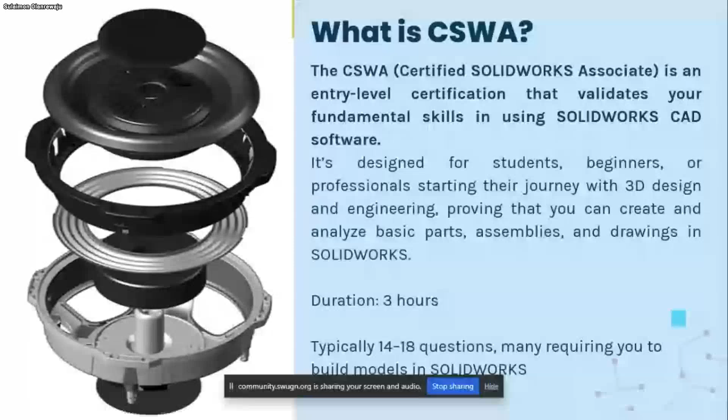So what do you need to pass, what are the requirements? This is one of the simplest, as I've said earlier. But your main focus should be: what is actually the question?

It's always very, very key to understand the question. Same thing goes - I know most of us here are students - it goes with your real life exams.

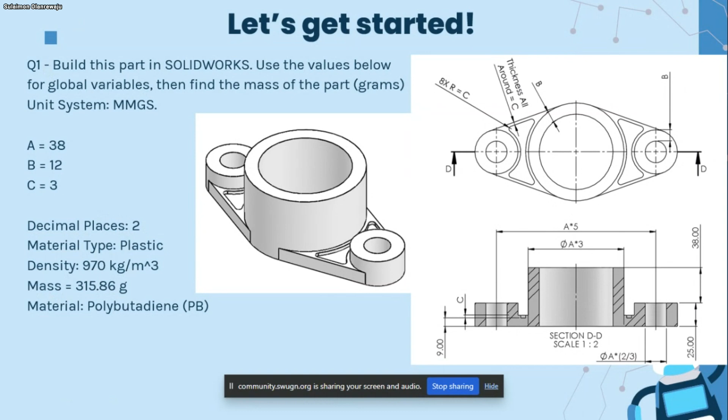The material here is Polybutadiene, that is PB. So once you want to change the material, you just type this in the material field. Notice I'm not supposed to show the value of the mass here, but this mass is wrong, let me just change that.

So as I was saying, let's go ahead and start. Make sure before you start your exam that your SolidWorks is already running. If possible, you should have already started the new part. So Control N for a new part, select it, and let's start.

So as I said, the first thing is: come to the bottom right corner of your PC and change it to MMGS. As you can see, there are several options here, they always give you IPS or MMGS, so select MMGS.

Material: change your material, select your material, just type in the material here - polybutadiene, as given. Then click Apply and Close. Make sure the density matches the one given in the question, that is 970. Then close. So we've done 2 out of the 3 main things needed.

Let's go back to the third one: what units, what is the actual question. So we've digested the question, changed the unit, and applied the material. Then save your work - you can save immediately, even without sketching anything. So let's save our work as Q1.

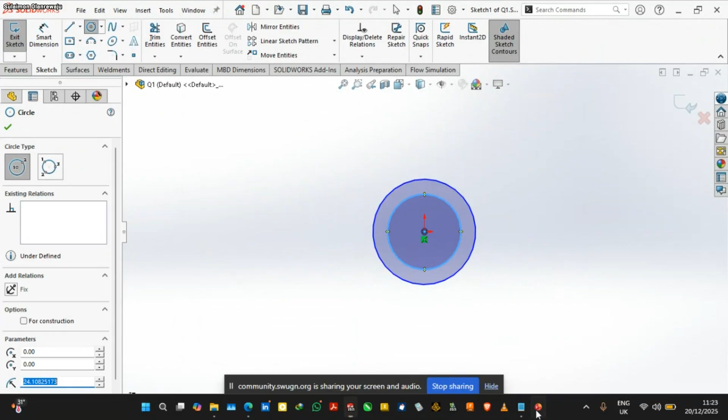Another thing is, if you see a question like this, most questions or some models are actually symmetrical in nature. What do I mean by symmetrical? If you look at the question again, you notice that this model given here is something you can actually design half of, and just after you're done extruding and applying all the necessary features, you can just mirror it and get your answer. That saves you time doing stuff like this.

I'm not going to do that one first because it might sound complicated. So I'm just going to do the basic: draw this circle, offset inside, draw this circle, offset inside, then draw this circle, offset inside. If you can do that, then you've already gotten the basic stuff of what you need.

So let's start that. The next thing is to draw these lines and make sure they are tangential to this circle, the outer lines. Let's just quickly do that, it shouldn't take time.

Circles, let's just do this. So one can just start drawing roughly and use your constraints to modify everything later on, like the way I normally made this circle. Let's start with just getting what we need.

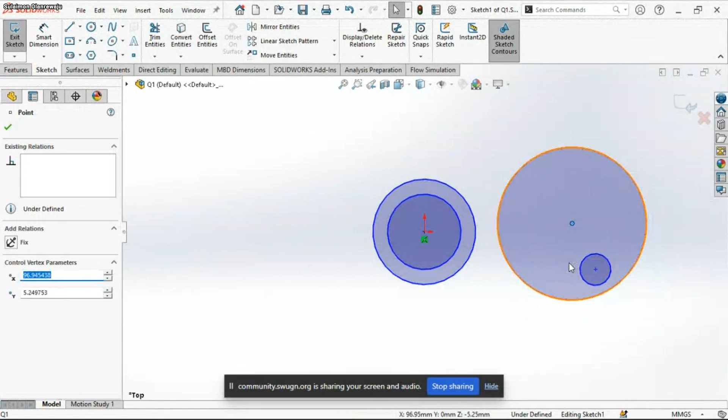Now I want to make this circle and this circle concentric. Oh first, if you notice, this circle now you can move it any way you like. Why? Because it's not constrained to location. So let's just try to make it horizontal with the origin.

So what did I do now? I clicked the center of the circle and the center of the origin, and it brought out disappearing balloon options that you can select out of. So make horizontal is what I chose now. If you can't do that, you can come to your left hand side and just add the relation needed, which is horizontal.

So the next thing is to make this circle and this circle concentric. Remember, you could also offset it, but it depends on you, anyone that makes it easier for you.

So I'm selecting this circle, and while holding control, make sure if you're selecting things you're holding your control or shift key. So I've held my control while selecting this tool. It got options: is it co-radial? We don't need co-radial. Is it tangential? No, but it's concentric we want, that's why I've selected concentric. I'll also come here and choose it.

Each existing relation will always show you once you select a particular object. Like now, if you select this circle, you see the existing relation under it. You see that it's nothing, no circle. But if you select...

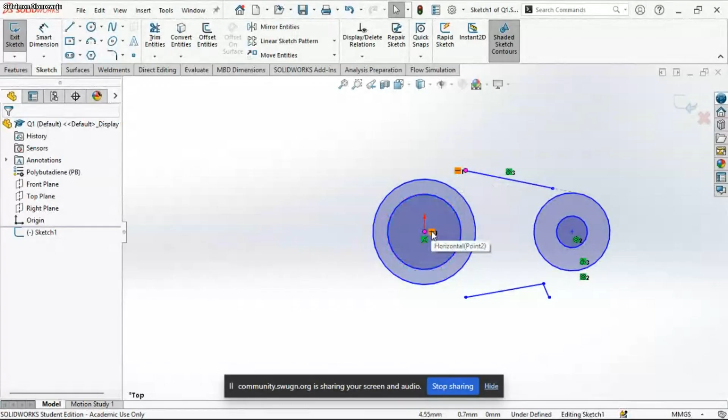So any constraint that you feel is obstructing you, you can just come here and delete it. We are still going to need them though, I don't need any line, any constraint, any relation yet.

So this line, we want to make it tangential and coincident with this circle, same as this line too. We want to make it tangential to this line and coincident to it. So let's just do that now.

Line, let's make it coincident first. This and this, you select them, then you come here and make it coincident first.

This point, this vertex of that line, and this—I want to make it coincident also. So the next thing is to make them tangential. How do you make it tangential? You cannot make a vertex tangential to a curve.

You can always make a line, a straight line, tangential to a curve. So while holding your control key, select the two of them and click tangent. Same thing is done for this one too. Make sure you click out after you've held control to select two entities, because now we are selecting a brand new entity.

So we do that to make it tangential, and we are up and around it. The same thing is done for these two too. Sorry, I was not meant to delete that previous horizontal constraint, so I can just add it back. As you can see, this thing is moving—our circle is moving. So you select both and make them horizontal back.

It always helps to add symmetry lines. If you go back to our plan now, look at our mid line, our center line. It's always good to add them when you are modeling or sketching, because it helps in the long run. Like now, maybe when you are done with this part, I want to mirror it to the other side. Do you understand?

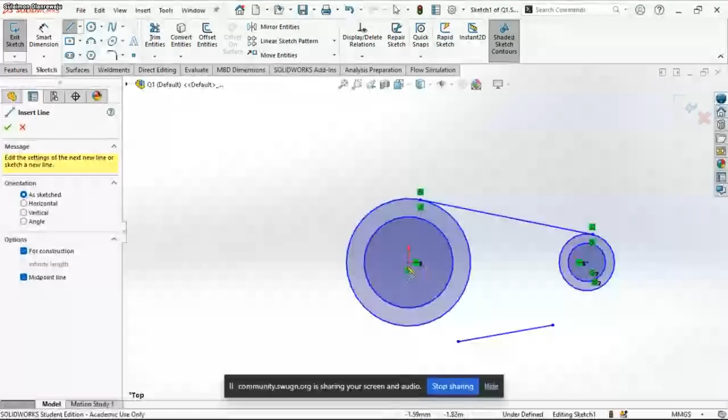So as I said, let's just click on line first, select construction in the options pane, and click midpoint line. So starting from this midpoint, you just need to let it go to any even level.

Doesn't matter. You can do the same thing to the vertical part, and you can do the same thing for the horizontal part too. So make sure it's straight, and notice that if you are drawing this, there is actually—how will I put it—a

increasing value, change of value as you are moving. That is to tell you the distance you've traveled, the angle. Like now it's showing that I'm traveling 124.55 mm at 180 degrees. That is in a straight line. So make sure you notice that while you are modeling.

And the constraint is showing coincident and horizontal. So let's just make it that and stop. Notice that these two construction lines are not used as a measure of knowing if your sketch is fully defined. So let's just keep going because of time, because we have to be conscious of that.

Since we've already done this, you can just mirror it. You get, but we have to make sure that all dimensions—aha, I knew I was going to make this.

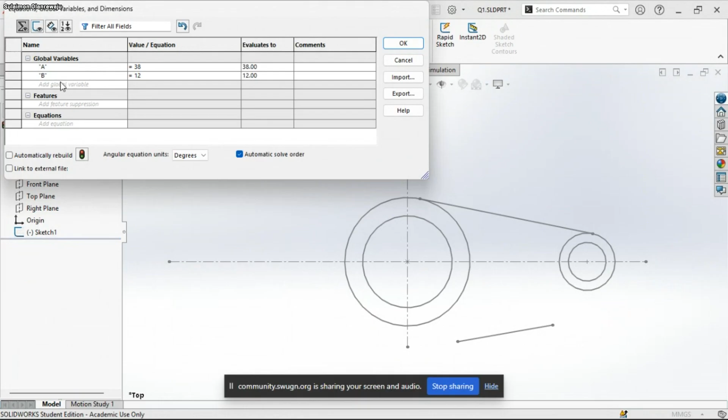Our B, make sure they're in capital letters please. B is 12—make sure you are very sure. And our C, after I can see, is 3 mm. Once you are done with that, confirm, always check your equations very well. Let's see, 12, very good. So do that.

Then we'll go back to our sketch. If you want to go back to your sketch, instead of coming here every time and clicking edit sketch, you can just click on the sketch and it will give you balloon options, and you come to edit sketch.

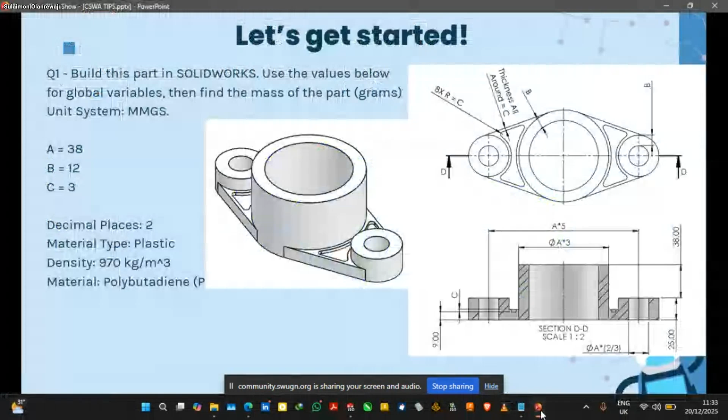So now let's start with our dimension, the basic dimension. Now set B is the obvious one here. So once you're dimensioning, you have to be very careful. The distance between this circle and circle is what? So it's showing 9.6 now, but we don't need 9.6. No, we want to enter an equation, a global variable.

So you always start with an equal to sign—make sure you always start with an equal to sign. So you can now come down here, then it will give you the options of your global variable that you saved with, and you select the right one. That is B. Then you click select.

So there's a difference between—now for example, let me just say I want to do the same thing for this.

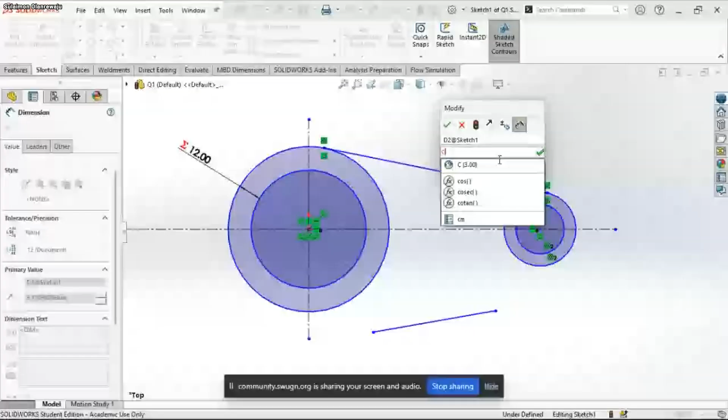Maybe the dimension for this is, if I just go ahead and type C and click this and say yes, it will just give me the actual dimension. It will not give me an equation format like you're seeing here. Be careful about that, we have to be very careful about that. This equation sign, this summation sign, shows that what you entered, your global variable, is what is being implemented in this dimension.

Another thing to do is go back to the question and look for the nearest easy dimension. So, the dimension of that one too is B. So it's either you come here and put your equal sign, global variable, and select B. Be careful when doing this.

The dimension for this is not showing in the plan view, but if you check the section view here, you notice that the dimension is given as diameter A multiplied by 2/3. So that's one thing about SOLIDWORKS.

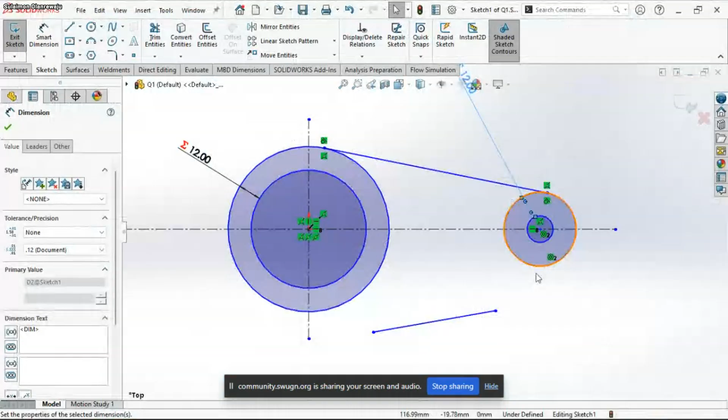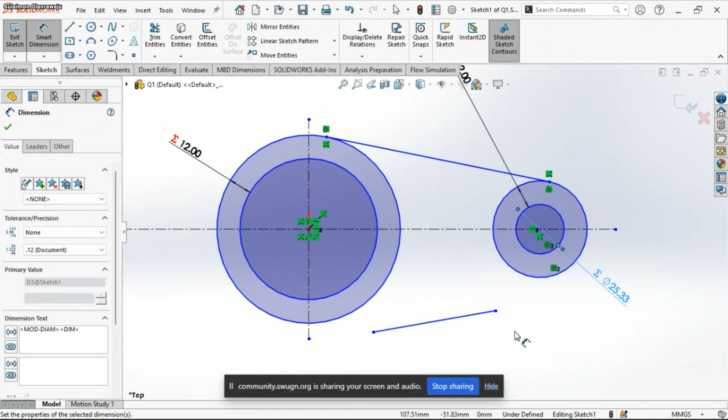Instead of inputting it on your calculator, you can just come here, click the smart dimension. Remember, start with your equal to sign, or the global variable that is based on A, then multiply, add it there. Multiply by what? It's in brackets, 2 divided by 3. So just put it there. It will tell you immediately. So instead of just cramming, put it there and it will give you what you need.

So what other dimension is given that you can make do with, like from here now we can see the diameter of this boss here is given, that is diameter A multiplied by 3. So you come here.

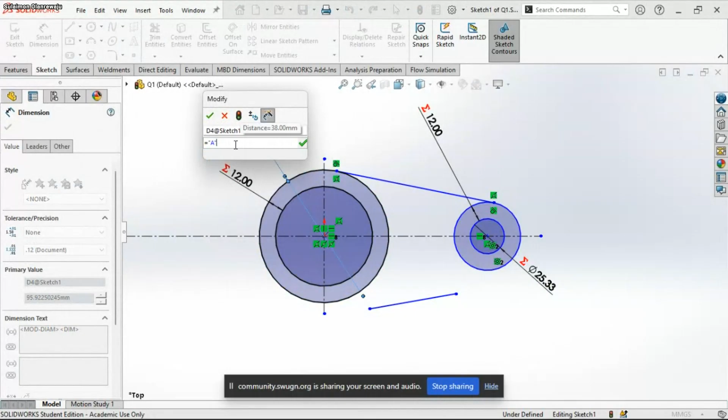So equals A, make sure you select the A first. It will give this light blue color if you are inputting the dimension. It should show with the two semicolon quotes that you are indicating a global variable, times 3. Click enter and this.

As you can see, the circle is already colored black. Why? It shows that this circle, both circles, are already fully constrained positionally and dimensionally. By position, they are constrained to the origin, which is at the center here, and dimensionally, you already gave them dimension. So that's why you should always be careful when working with dimensions.

So if this part showing blue now, it's to show that they are not fully constrained. So now the next one is the distance between the two side bosses, that is this and this, which is A times 5.

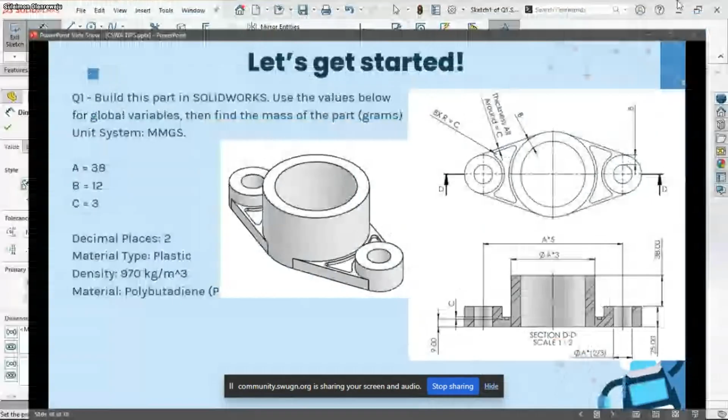To do this, since we've already indicated our midpoint line, you just use your smart dimension, click on this center and this, automatically it brings it. Make sure you extend your line. If you want to put it here, that means you're saying you want the dimension of just these two. But if you want the full symmetric dimension, that is from the midpoint to the side boss, you have to shift your cursor to this side and enter the value.

That is, equals to A, select it, times 5, and click equal to. So now always notice, come down to this bottom corner here, you will notice it's showing underdefined. That means you are not really working with your fully defined features yet.

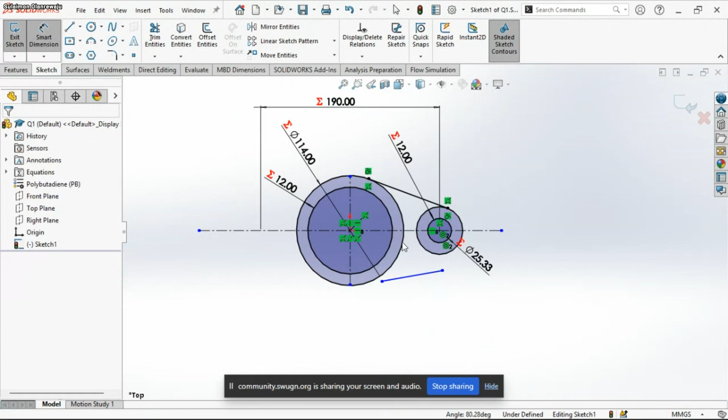So if I delete this line out, what is stopping me? What is stopping our sketch from being fully defined? Always press escape after you've already done the necessary dimension. What is actually stopping us is this line, which is positionally unconstrained and dimensionally unconstrained. So if we delete it now, you'll see it's going to be fully defined, because every other thing, like I told you earlier, your construction lines are not an avenue, because this one too is not constrained dimensionally.

But from it, you can notice that the main object you are working with, that is your lines and your circle, they are fully defined. So from this now, you don't need to do any more stuff. You can just mirror your way through. How do you mirror your way through? Using the mirror command here.

Mirror this entity. What are we mirroring? We are mirroring this entity first. About what? You are mirroring about this horizontal center line. Oh sorry, your entity is the first box, and your mirror about is the second one. So select. As you can see, it's still fully defined.

So what do we need to do next? We just need to mirror this half of it, this right half onto this other half. So that is including the lines and the circles. So how do we do that? Same thing, mirror these entities.

You see how I selected them, dragging your cursor from bottom to top. It will select things that you don't need. How do you fix that? You just click it so they get excluded from the entities box here.

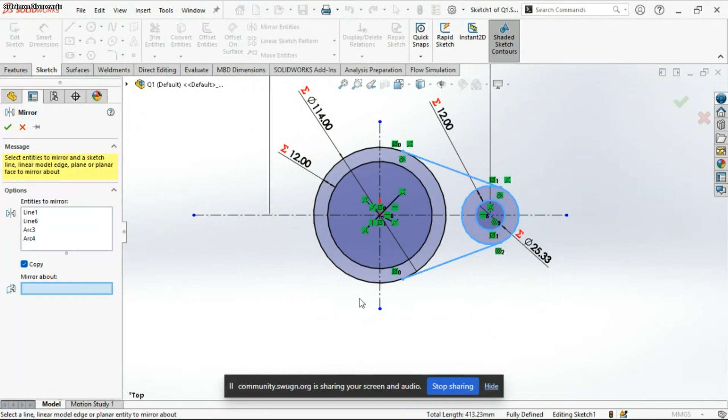Then mirror about the vertical line now. So we've done that, please be time conscious. I'm just doing this to make sure you guys are very conversant with fully defined sketches. So now that ours is fully defined, we can skip this.

Make sure you save your work in case you're using a PC and there's power interruption. But please, you have to be very careful when running an exam. You have to be conscious of your PC power, because once you start answering questions and your PC goes off, getting back to it is usually strenuous. So make sure your battery is okay and if possible plugged in throughout, as I'm about to do now.

So from this we can start doing the basic extrusion. The questions can be tricky, because sometimes they'll give us the extrusion of the side boss, that is 25, as you can see here. Then from the top of the extrusion of the side boss to the bigger boss, they give us another dimension. So I'm going to teach you a trick for that.

Let's do the basic extrusion of those first. That is 25 and 38. You see all these are not global variables. Any other part that is a global variable, make sure it's indicated there as a global variable. So let's go. That's 25 first, then 38.

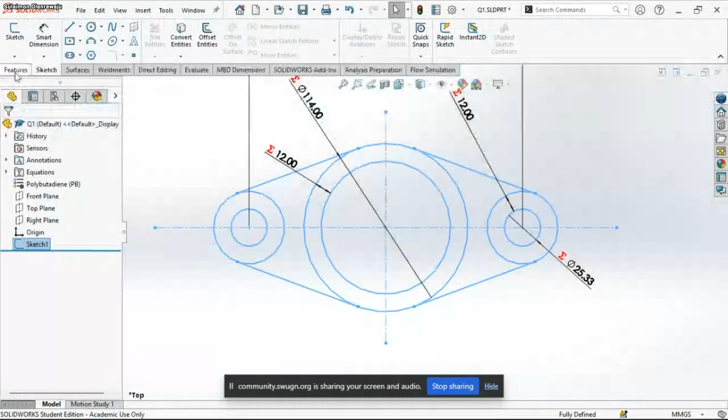Okay, let's go to features and extrude. Make sure this thin feature is not selected, because sometimes it might be selected and you end up doing something you're not supposed to. So just make sure it's not selected.

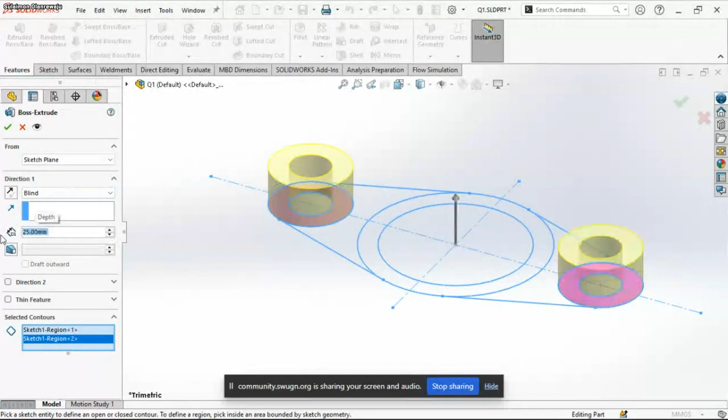Select the contours. What are the contours? That is this and this. We are extruding to 25. Make sure that is done.

Once you click on it, your sketch usually disappears. Yeah, it will even disappear. But you can always get your sketch back by clicking on the arrow beside the boss you just did, and clicking on the sketch to reuse it to extrude again.

So as I said earlier, select your contour. This is the contour we're selecting now. It's giving us 25, but it's not 25 we need. We need 25 plus 38 as described in the question.

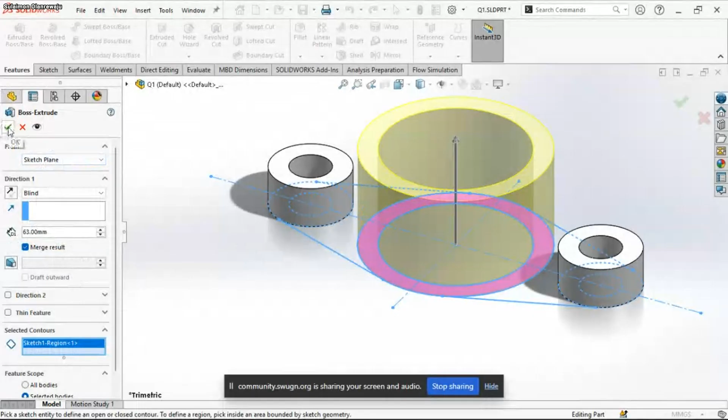Make sure, since you're working with just one part and not multiple bodies, that your merge result is selected. So we do that, and that one is done.

So the next one is to extrude this part. Let's look at the question again. You notice that the extrusion up to a point, the web between those two bosses, is 9mm plus C as indicated here.

So make sure anytime you're doing that, you add the required value. Let's extrude that too. Select the sketch, extrude, contours, that is this part and this part. Now the values.

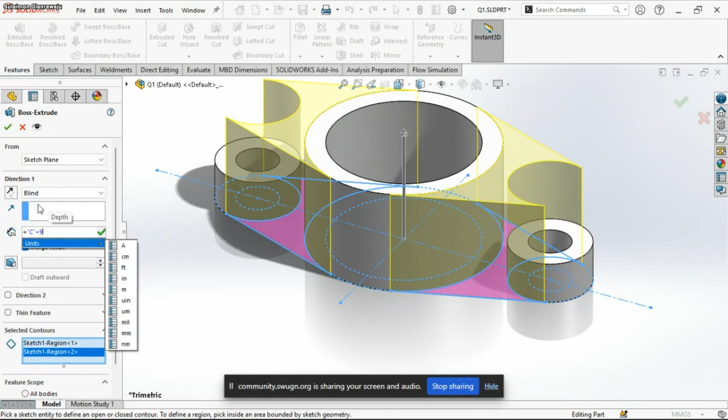To do this, you have to enter the value first, that is your C first. You press the equal to sign, and it will give you the equal to sign, and you type C. Just do it, that is your C. Then plus 9mm as was indicated there. So click enter and press OK.

Notice that from the question, this small extrusion as you can see in this section is the word C. So I need to be fast, because this is already taking much of our time.

So this is a cut extrude. This C value here is a cut extrude of this offsetted entity on both sides here. So don't let it confuse you. That's why from the section it's just this thin part being viewed here. So it's that part that needs to be extruded downwards.

So once you have done the extrusion, we just need to do our offset and our extrude cut. There's a difference between extrude boss and extrude cut. So now let's just go ahead and do that.

Once you are done with this, click on either of these webs and sketch on it. Once you are sketching on it, go to your offset entities. Once you click offset entity, be careful here. Select the entity first, that is this shape.

Now, do you want the value? The value is given in the question. Let's check the value again so that we don't lose that. They said thickness all round is C, so that means the offset here, that is the thickness of your web, is C. So now delete this.

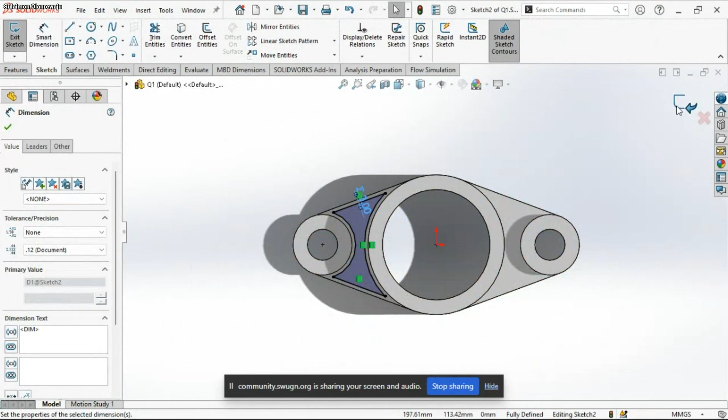Okay, I think it's best to fillet it. Let's go to our sketch, fillet from here. So these are fillets here, sketch fillet. Let's enter the value like that.

I don't know, sorry, what's this? You have to just enter the value. So let's say the entities you want to place it on are this, this, and this. As I said, you have to go back and change it because they said our sketch fillet is 8 times C, 8 times radius, fillet radius. That is 1, 2, 3, 4, 5, 6, 7, 8.

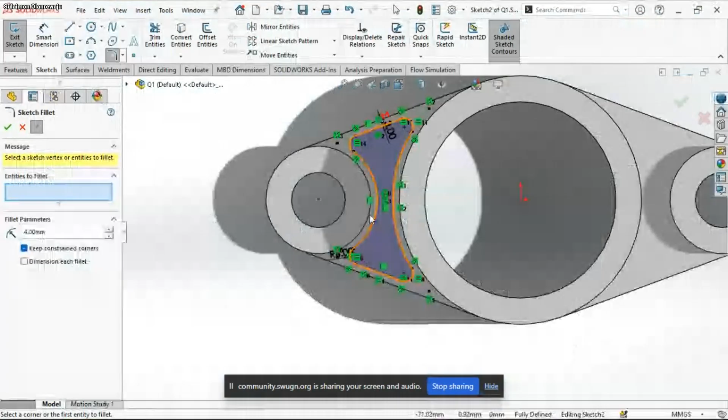But we can just work with one part and mirror the other one. So come back here, zoom in and change the value to equal the global variable C. Once done that, save your work. Exit the sketch environment, select your sketch, make sure you save your work, and extrude cut.

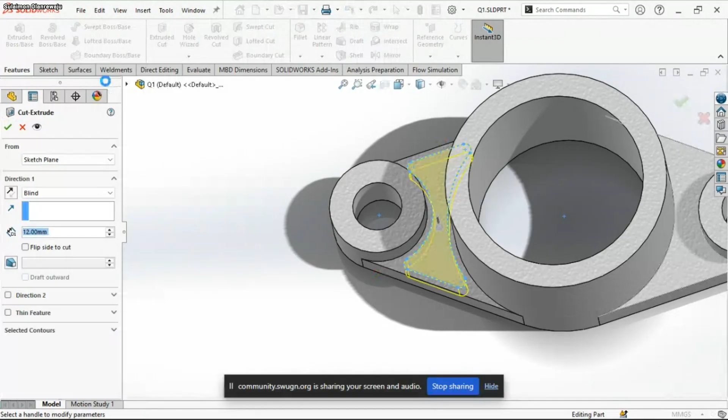We are not extruding, this is extrude cut. Now we are extrude cutting by what's indicated in the question, that is by C. So you see that C is used multiple times here, so you have to be very careful. Make sure those global variables are used, or else it will affect your subsequent parts that you are in. So press enter. Everybody following me?

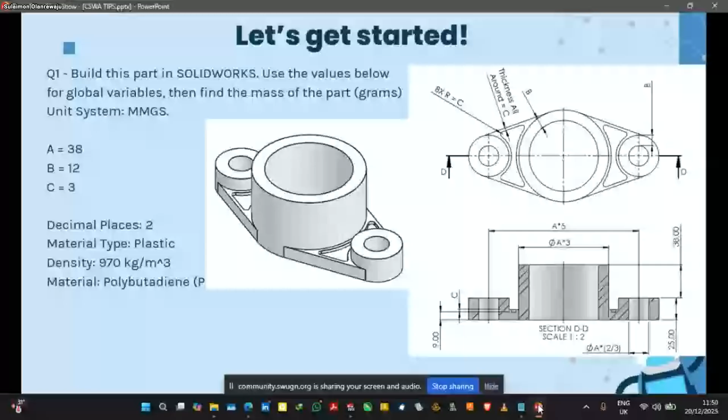So we've done for one part. Let's check that it's right, we've done all the necessary stuff needed. Is there any extra stuff? Checking from this isometric, I don't think there's any other fillet needed, so we can just mirror directly.

So let's just mirror this feature to the other side. You click on this and click on mirror. It should ask for the face first. How do you get the face? Come back to your plane and select the right plane, so it depends on the plane you are working with. Anyone that is actually a mirror plane, a symmetry plane to what you want to mirror, is what you are going to select. So you do that and click OK.

So is there any other thing? Make sure you check your positions very well. Have you added all the needed dimensions? Are all your sketches constrained? I think we've already done all the required thing. So the next thing, since we've already done our material - because some people, after they model, they start applying material - it's always good to apply the material first, except the next question indicates otherwise.

So now let's just save our work. Remember, this one is Q1.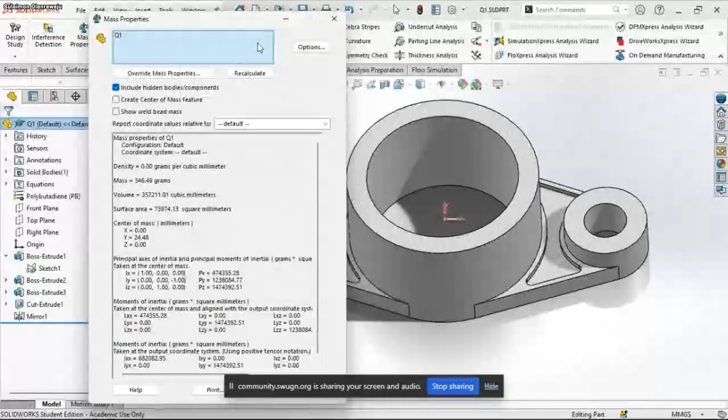So let's check our marks. Just come to your evaluate and click on your mass. Always make sure you select what is needed to be weighted, because there are some parts that are multi-body stuff. They may just ask you for the mass of a particular part and not the entire model. So make sure you select it.

That is your Q1, 346 grams. Make sure it's in the right decimal places. Take note of all the required values. Sometimes they may ask for volume, sometimes surface area of a part, or center of mass. Always take note of this.

So it's from your mass properties that you are going to get all that is required. Since we have gotten 346.49 grams, we just save our work. As you can see, our Q1 mass is 346 grams.

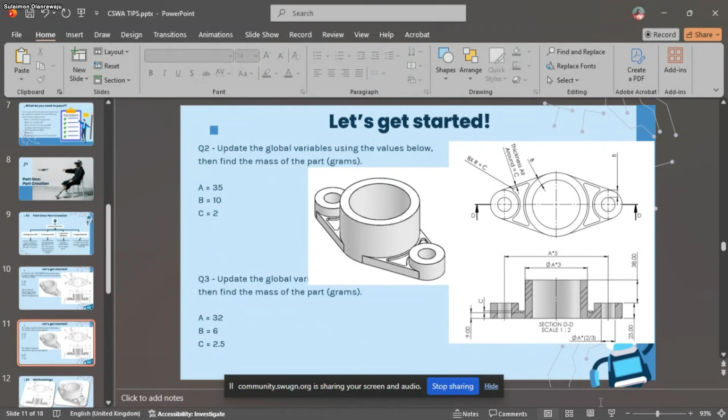Are you following? From this you can see that we got our mass right, that is 346.49. Usually SolidWorks takes a 0.05 plus or minus error percentage, so just try to make sure your answer is precise.

So that's Q1. Now Q2 says update your global variables using the following: 35, 10, 2, and tell us the mass, indicate and type it. This next question requires you to type your answer very carefully when entering these values.

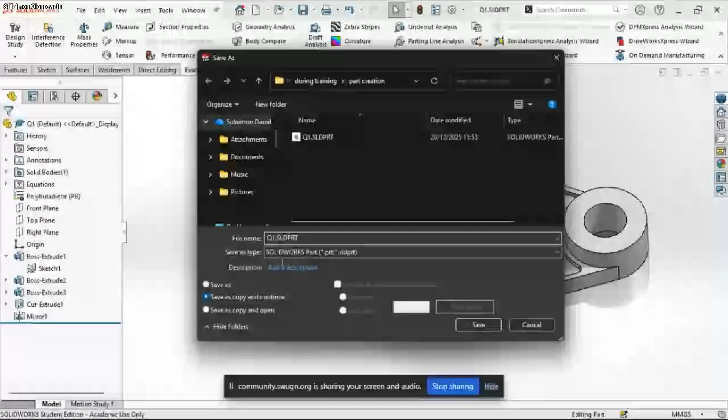As I said earlier, if you want to answer the next one, save as copy and continue, and indicate Q2. It says save is already open, please choose a different name. I think I have a file named Q2 already. Let's give this one a different name since I'm saving it in this place.

Now let's come here to your equations. All the equations you've entered are indicated here. Right click on this equation and manage. According to the question, it's 35, 10, 2, so just change it here: 35, then 2.

Once you click OK, rebuild your work. The rebuilding is automatic most of the time, but sometimes if you don't rebuild and check your math, it may give you the previous value of the mass you used. So just rebuild and save your work.

Remember, it's save, not save as, since you are working on the same file. Instead of coming to evaluate and checking mass properties, you can just type S and click on insert command. Instead of pressing that, just come here and type S on your keyboard, and it will bring up the mass option.

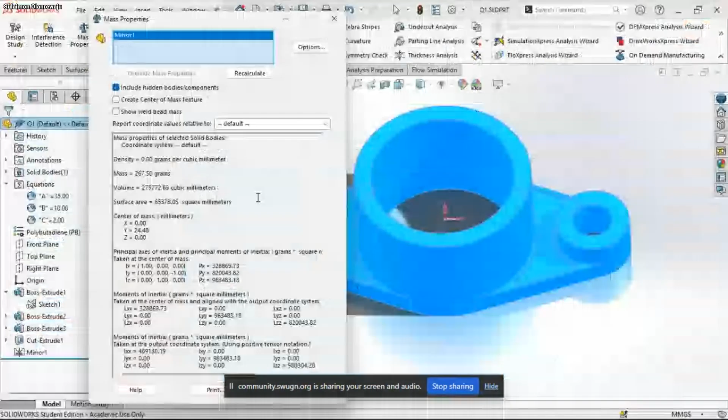So we do the same thing for the next question, which is 32, 6, 2.5. Let's save, then come here, save as again, name it Q3, copy as, save. Now come here to your options, manage equations.

So 32, 6, 2.5, have I got it? Let me check again. I hope you guys are following this. We're almost done with part creation, and there's only one example we'll be doing from now: 32, 6, 2.5.

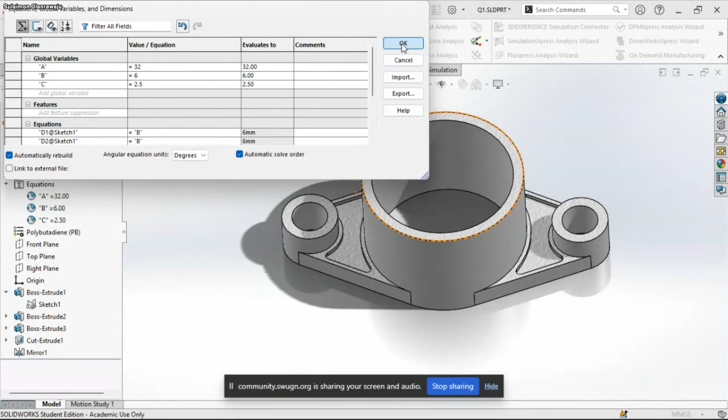It's always good to select automatically rebuild, so it reviews immediately as you make changes, so you don't need to rebuild every time. As you can see, as you change those variables, they are changing immediately.

I don't know if I indicated this earlier, but make sure you are using a mouse, please. The mouse is very key in modeling. Let's check our mass, press the shortcut key S. We get 158.28. Let's confirm. Yes, 158.2, so we've gotten that. That will be all on our part creation.

Do you have any questions? Anybody? Everybody?

Any questions? Mr. Timitokwe? Guys, though. Okay, Enila, you have a question. Let's see.

Thank you for that. My question is, I don't know how to put it as a question, but earlier this week when I was revising a CSWA question, when I was done checking, the mass was not the exact value as the answer. It was within plus or minus, I think 0.1%, but it was not the exact value. I don't know what was wrong, because I even went to YouTube to follow a guy, since there are many ways you can build a part. But even after I followed him, it was still not the same exact value. It was close, but it wasn't the same.

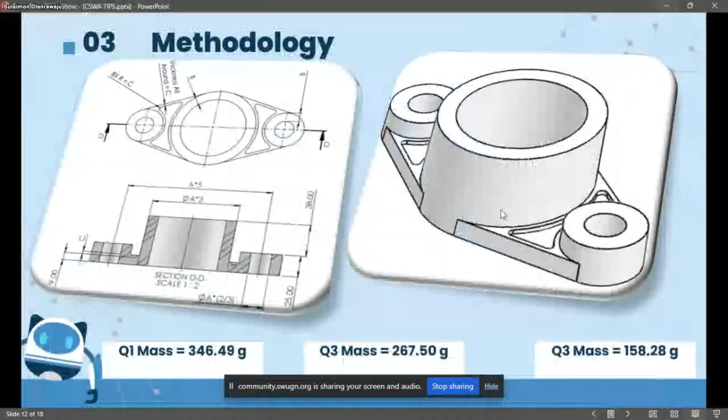It's still the same dimension, every time, whether it's extrusion too. Another thing that can help you when you are modeling - let me go back to the model. Okay, let's close this. Look at this now.

If you want to actually know - and again, another error you could have made is maybe misentering some values - like now, you want to quickly know the dimensions of what you've done so far. If you click on all these values, it will show all the dimensions you've entered. So you can use that as an overview to know, and you'll be comparing and contrasting directly, like is it 6, 160...

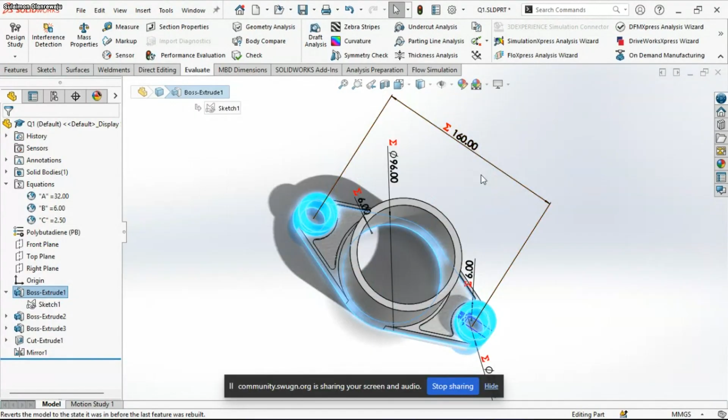96, all these values - I know that sometimes you do the settings so that it's showing just the global variable. I think that's in display or settings. So from here you can even edit values instead of going to the sketch or the extrusion. But you have to be very careful when doing that.

Like for this one now, if you double click on this, it will direct you back - since you're not entering a new value, you're just going to click on store, so we have to be careful. If you click on the second box too, it will show you the dimension of the sketch and of the feature. The one in blue is the feature dimension, that is the extrude dimension, while the one in black is the sketch.

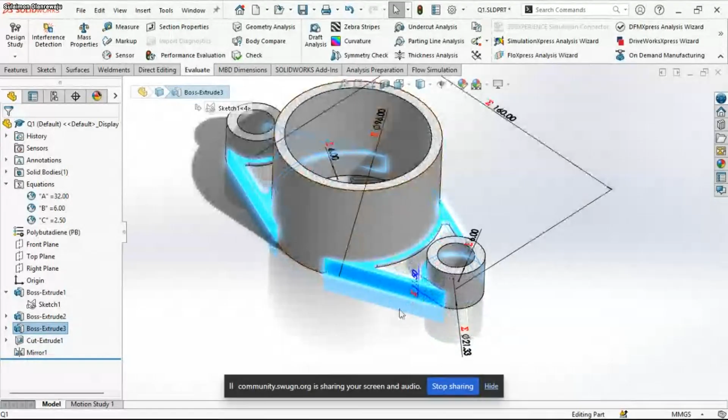Same thing goes for this - like this one now, it shows all the dimensions of the sketch. Since it's just one sketch used for the 3D extrusion, that's why it's showing the same sketch, and this 11.5 is the extrusion value. You see now, if you do a cut extrude, it's only showing our offset values and our fillet values, which is in sketch, and the value of C - this is the new value of C, that is 2.5mm, which I just changed now.

So I don't know if that answers your question.

There are many possible ways. Maybe you didn't get a particular geometry well, you used the wrong fillet. That's why you need to be very, very careful with your fillets and rounds. You always need to interpret the question very well, because these details are very important.

Sometimes they will give you a fillet of maybe 0.8 or 0.5 for a particular part, and if you don't indicate it in the other part... let me just fillet this part now, for example, and show you something. We got 158.28 grams now. Now let me just add a fillet here.

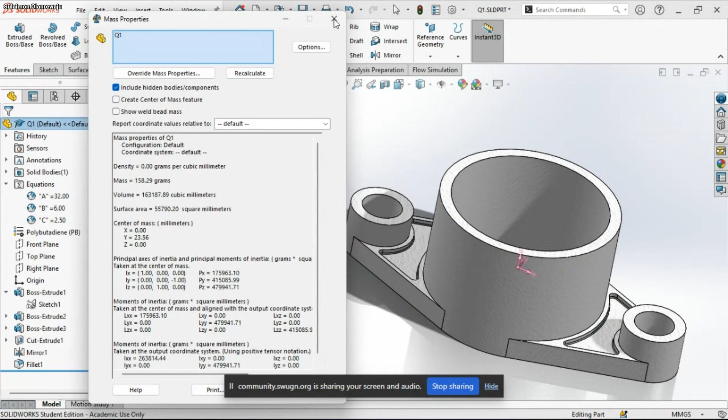Let's change the value to, say, 0.5. Okay, so if you check the mass of this thing back now, you'll notice that it has changed. That is 158.29, which is different from the previous 158.28. So all those kind of key features are very important when you are modeling.

Generally, it's not even about exams now. When you are maybe working professionally, trying to model a very important part.

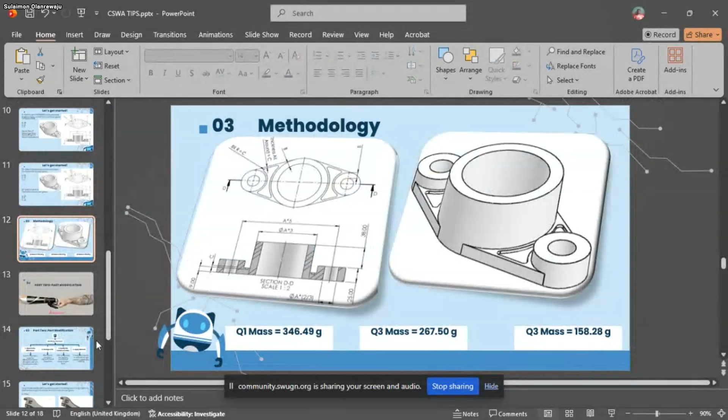Please, can you come again with the saving? Okay, I said save as copy and continue. If you save as copy and continue, it will always work like this. Maybe anyone you are done with and don't want to work with again, maybe you've already checked your answer, then you can now save as copy. But don't use that often, it's always advisable not to.

I made a mistake. It should have been save as, then you select the option of save as copy and open. You want to save your current work as the current one, then open it.

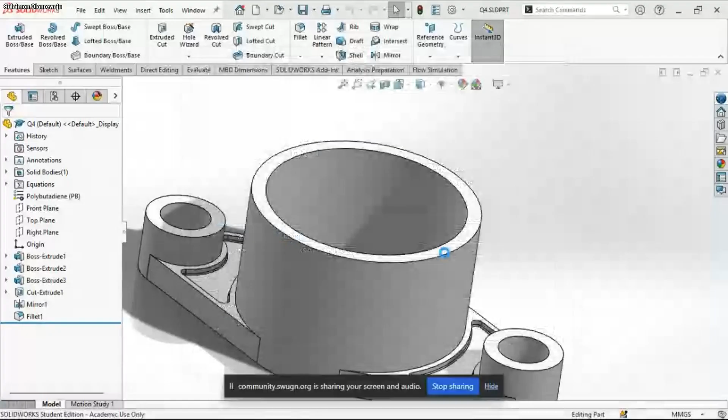Then you do that, it will now give you an option. Let's say it's Q5 now. Save it, it will save it as... it will give you this option, original document or close the original document. Always close the original document, because if you flood your work with too much of this and click don't show again.

Do you get it now, Manila? Yes, yes, thank you. Okay, okay, okay. Let's just close this now.

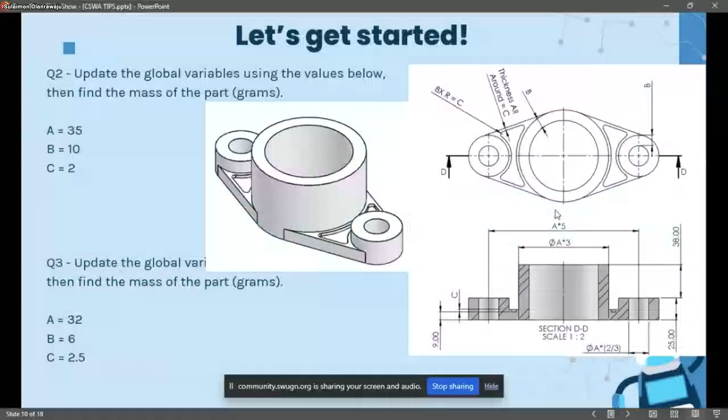So, part modification. Part modification is where they've already given you a model. They'll ask you to download a particular file. So to make your work easier, once you start the question, make sure you go back and check each and every question. There will be a part given for a particular segment or section, so make sure you download all those parts first.

Download them with the flash drive, then put it inside the computer that you are working with, that is where you are going to be doing your model. If you are using two PCs, save it in a flash drive and send it directly to the PC, because you are going to make use of it with the computer you are using to model. Do you get it? So make sure all those files are readily available before you even start, if possible, make sure, because of time.

Once you've already started, they will give you a file, they will show you, they will ask you to make a modification. Maybe they want you to remove a particular aspect of the geometry, maybe a fillet that they want you to remove and change to a chamfer. It may be that they want you to remove a rib and change it to a web. It may be that they just want you to change the geometry, like maybe a circular hole you should convert to a square hole or a rectangular hole. So you get, that's what happens in part modification.

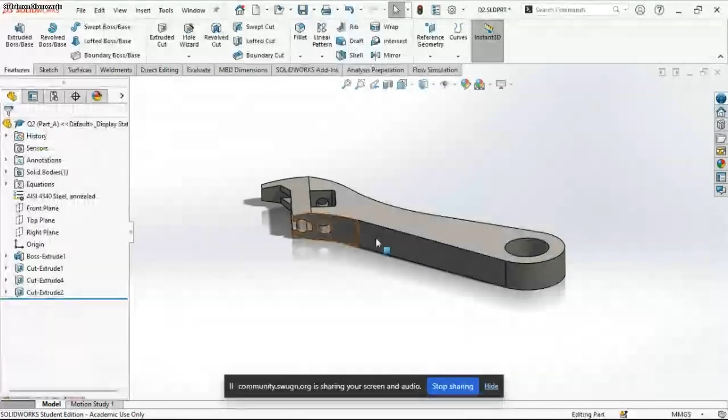So let's be careful when we are offsetting. Come to, we are in sketch environment now. The offset that we're told to do is 1.5. Let's put at 1.5.

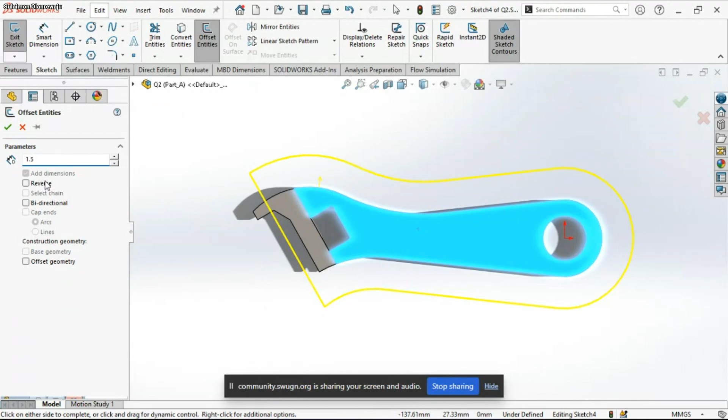I made the same mistake I made earlier again, you are going to forgive me. Make sure it's in reverse. Save. And what is the mistake?

If you are following me, you need the material. I will confirm the material. The material here, I think the material is...

I made a mistake, I should have added material. The reason why it's not showing in my slide is because when I was editing this file, the material and everything is there. So let me just show, the material given is this material here, this AISI 4340 steel.

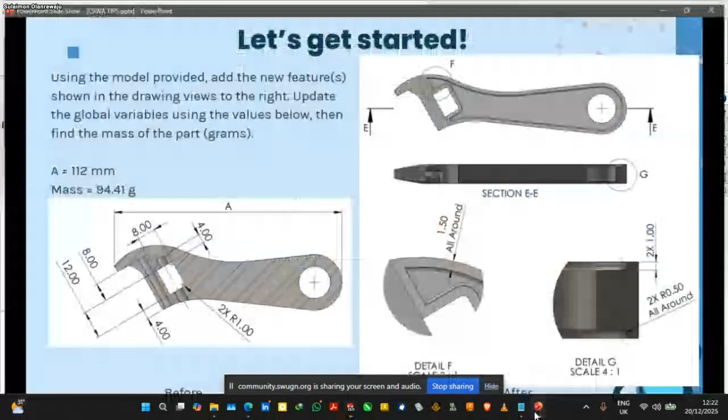So make sure you take note of the material and what equation, like I said earlier, manage equation 112. 112 is given here. Yeah, 112, so that one is done, that one is already changed.

So let's check our questions very well, let's make sure that everything is okay. 1.5, so it's not giving us any modification as a global variable. Let's just extrude, don't do any filleting in your sketch environment, that doesn't require.

So let's just click on this extrude cuts, extrude cut by 1mm and what, fillet round. Let's go by 1mm. Always use your middle mouse button to...

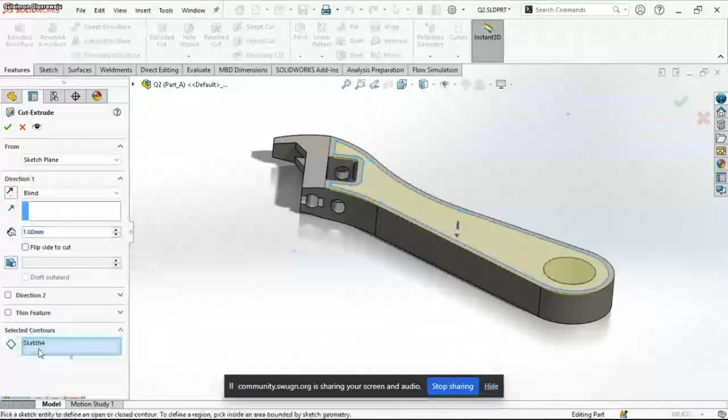The selected contour is delete, let's do this. So once you've done that, you now want to fillet all around. How do you fillet all around? Come to your features. Oh, sorry, as I was saying earlier, you save as.

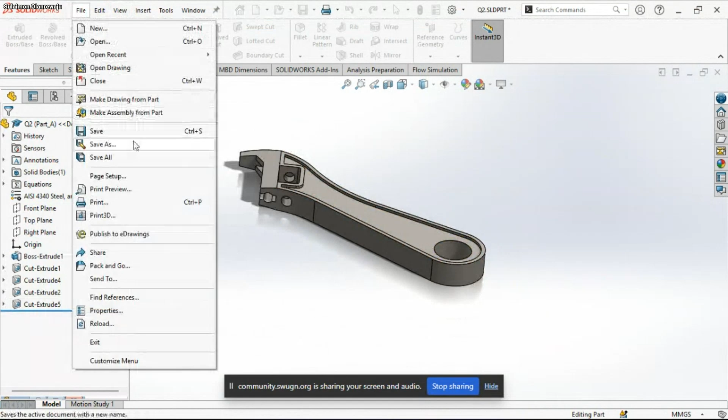Save as copy and open, save as copy and open, so during training, part modification, so let's just say this one maybe Q10. Save as copy and open, let's see.

So you can see that's changed. So now we now go to our fillets, 0.5. How do you do that? As you can see, the fillet, you can do this by selecting one side. Automatically it's able to because the change selection is already in effect. So you change to 0.5.

So let's be careful when we are doing this. I hope you guys are following.

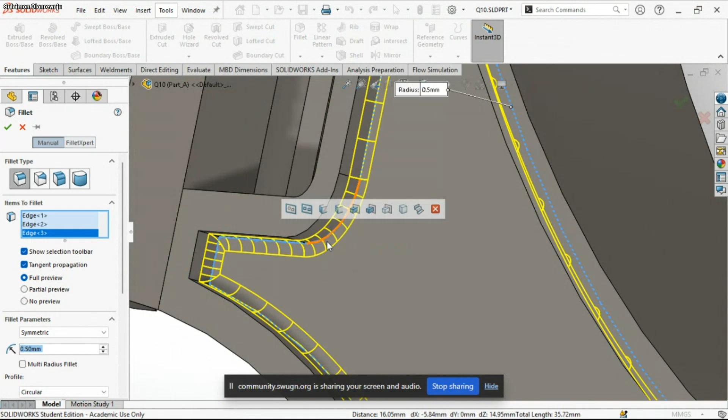Let's check. You see, you selected just this part, just this symmetry, just this geometry. You didn't select these ones and these ones. So you have to select them one after the other. Be careful when you are doing that. Make sure everything is highlighted.

So all has been selected now, and then you click enter. Another way of doing this, let me suppress this. Another thing is that you should know how to suppress some features, since sometimes you don't need something, especially in part modification. Sometimes you have to roll your history bar up to a certain level and start from there before you do anything.

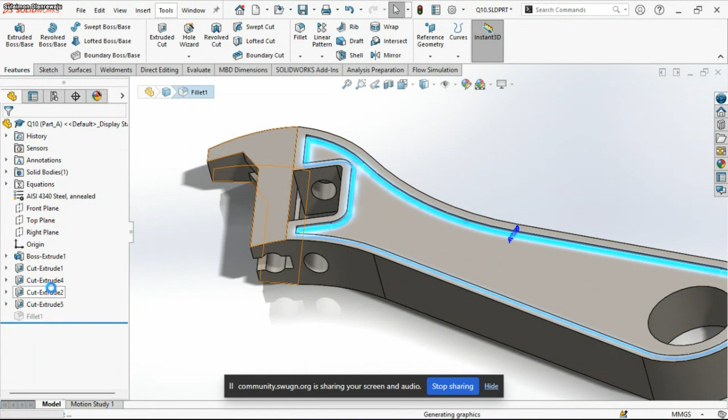When you are doing part modification, sometimes you can start from maybe where you met it, like this one now where I met it, I'm starting from there. Then you have to roll up to a certain point before you can do some modification, then roll back. Do you get it? Now let me suppress this fillet and try another fillet method.

So if you click on fillets, let me click on just this bottom side for point five. It will select everything related to it. Then, since this one is already selected... aha, see the difference now. You see, it selected this part and this hole too. It gave it that same fillet.

So now let's check our question if it is required. According to our question, it is not required to fillet this way. So that means the first one is correct, the second one is not. Do you get it? So let's be careful when doing that, because if it was filleted, it will even indicate here that the part is going to be curvy. But it's a sharp hole.

And I think this thing is done on both top and bottom side. I didn't even notice it earlier. If you notice, this extrusion and fillet is for both sides. So let's just hope that it's done symmetrically first, like maybe the symmetrical plane they have is actually at the center of this object.

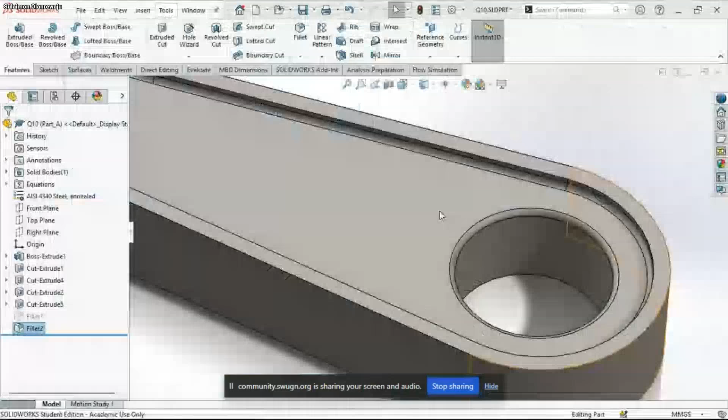So that means this one will have to be deleted and this one will be activated. So we've done the basic thing. It's just for us to mirror it for it to reflect. So let's check our planes first.

These are front plane, our top plane sits at the center. So you press your space bar to show you all your views. Which view do you want? Which view do you want to check? Is it your front, is it your top, is it your side? So you want to check our front now and click on our top plane. As you can see, it's actually at the center.

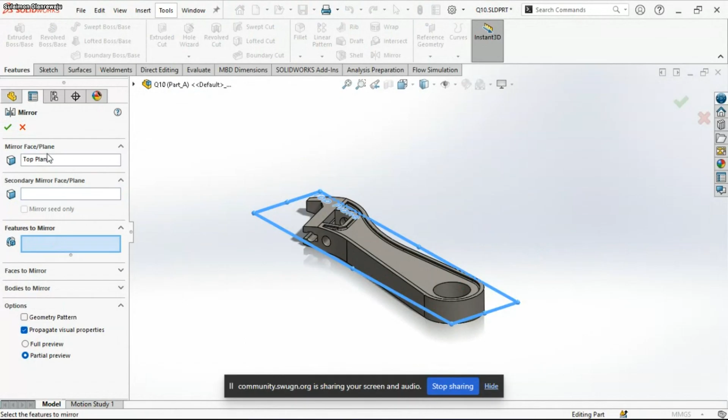So that means we can actually do our mirror. You just come to your mirror. So automatically it says okay, your top plane is the mirror plane. While the feature to mirror, what is your feature to mirror? Feature to mirror is the cut extrude, this cut extrude that you just did now with your fillet.

You have to select two of them. Select the two of them when you are doing that. Be careful when you are doing that.

Because sometimes if you just do only this top part and you check your mass, you notice that it's way higher than the one in the options, and it's not in the options, which is very, very tricky. So you can't really know whether you are right or wrong. So when you save, we'll check our mass.

94.41 grams. As you can see, we are actually very correct.

So this program is supposed to end by 1 and we only have 30 minutes more. I don't think so. Let's check if we got the answer. So as you can see here, the mass is 94.41.

So let me just use this one to summarize what we've done so far. Do you guys understand what I've done so far? Any lapse, anybody? Hello everybody. Yes, sir. Yep. Any question?

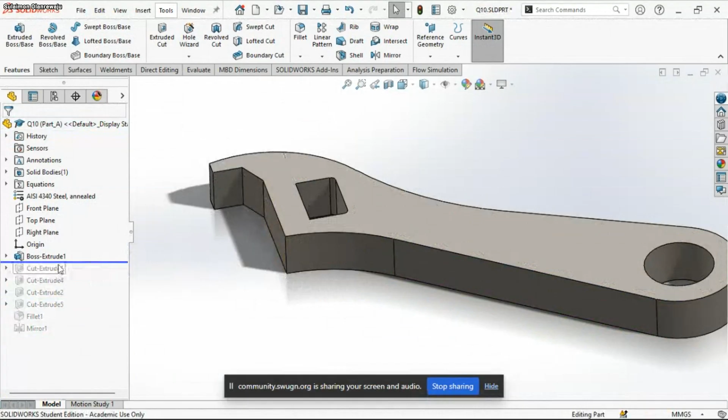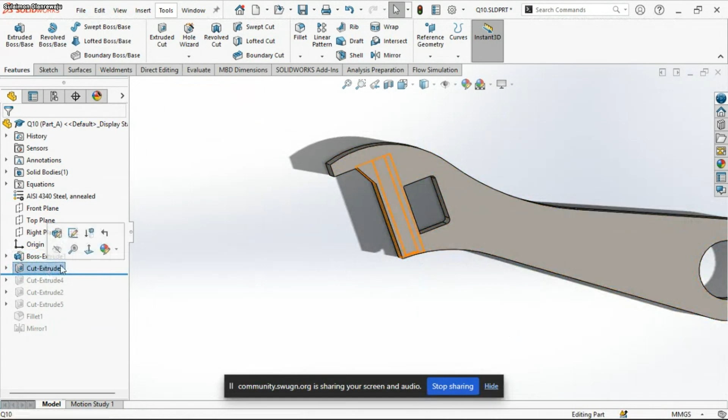Let me see the 85. Okay, from here onwards. Let's suppress. I hope you guys are following. So create a sketch. Instead of the way they did their own, maybe my own is just a rectangle.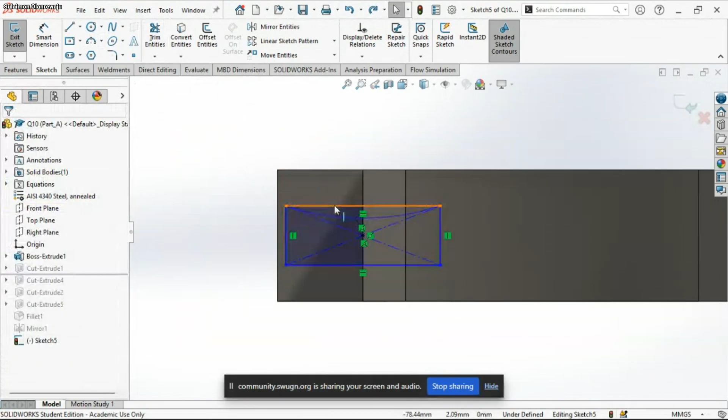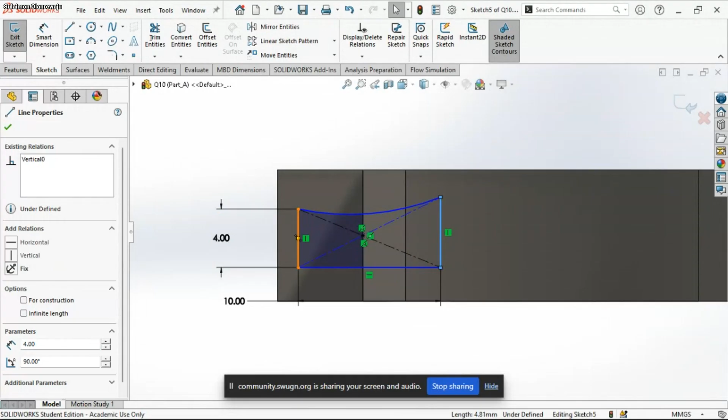And a half. Remember, you have to make your sketches fully constrained. You have to dimension it. You have to fully constrain it. Make sure you use all your constraints. I like using constraints like this one. I want to make them equal. Instead of giving that one a dimension, just make it equal. Every value.

So let's give it. Can see it's fully black, so dimensionally and positionally, it's fully constrained. Let's just do that. Extrude, cut. Through all, the opposite direction.

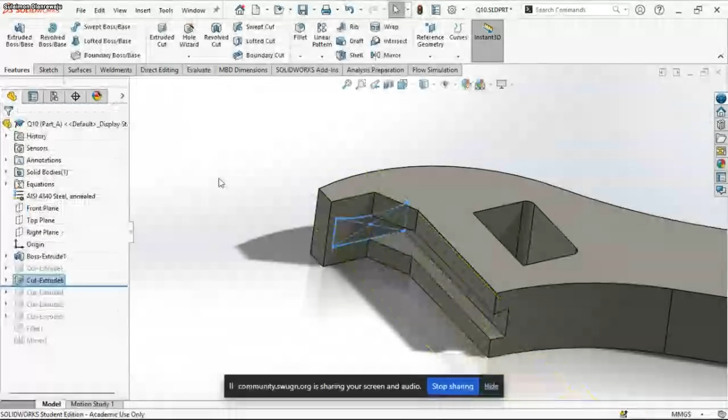The next session we're talking about. So let me just round up. Are you guys sure there? And if you have done this, remember, save as and continue. Save as and open. Sorry, save as copy and open. Q11 and B. Make sure you do this.

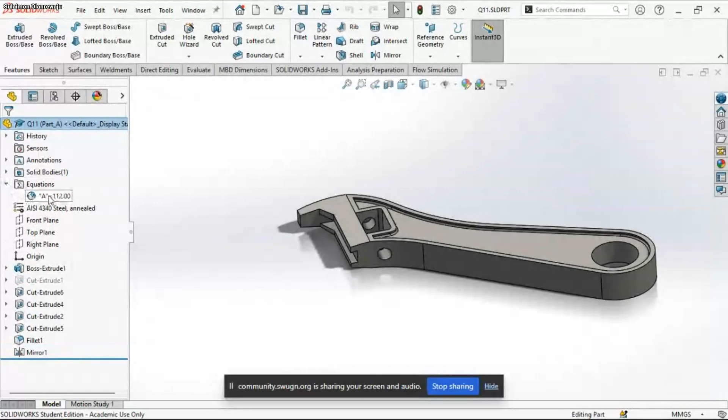Let's change. If you measure the mass of this one now, you see that it has changed to 96.4 grams using the same materials. And they may even ask you to change your global variable. So always take notes: your variable, your material, and your units. Very, very, very important. Those three are very, very important.

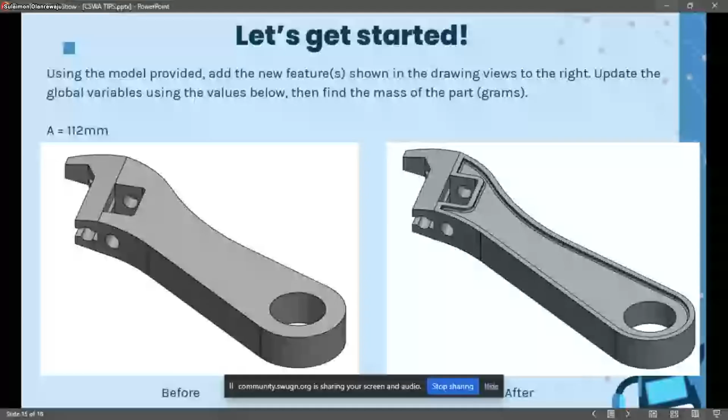So do you understand that, Mr. Hafiz? You understand this? Can you indicate if you understood what I just explained? You can answer yourself if possible, or you can just let me be answering.

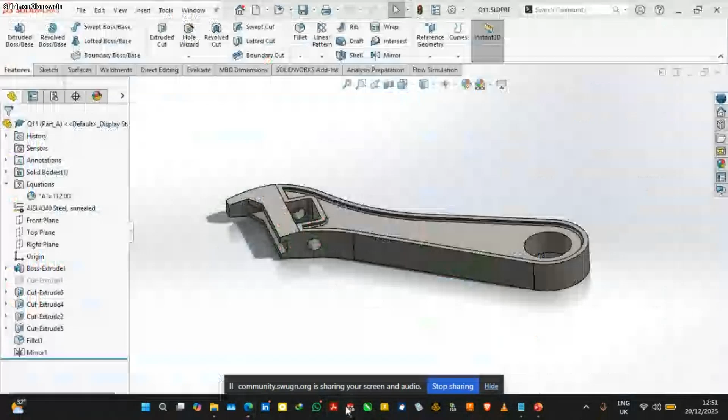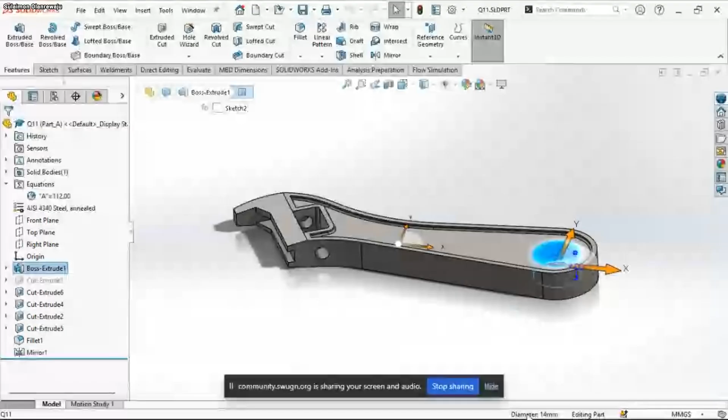So sometimes if you check your questions and you notice that maybe the dimensions are not correct, you can check if all your dimensions are conforming. SolidWorks is very, very good with that, because if I want to know the dimension of this hole now, instead of just searching for the sketch every time, I click on this hole now and it will give me the diameter. But if I want to know the distance between this top and the bottom, I can just click on this line here and it will give me the value of the length. That is 9 mm.

If you want to know the distance between one face and another or the angle. Like this place, I want to know the angle. Just click on this, holding your control key, to give you the angle between them here at the bottom corner. So that's another quick fix, quick tip on how to do basic measuring.

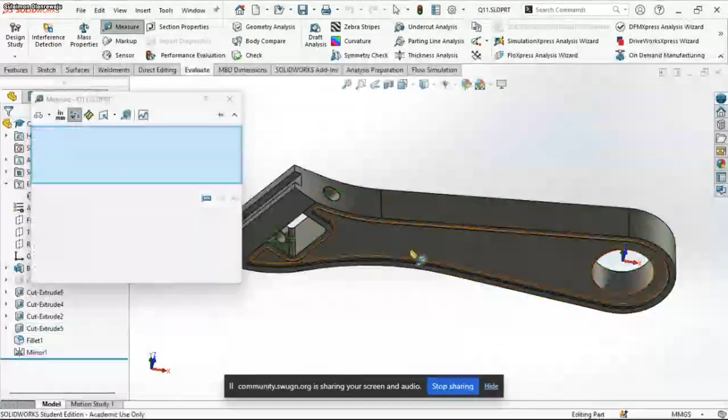But if you want to actually know the measurement, you just come to evaluate and click on measure, then do the necessary. You see between this face and this face. Because some questions require you to just measure, as I said earlier. So you know the distance, say to indicate that distance between this face and this face.

The area to give you the area and perimeter. For instance, it was 7mm. Why is it 7mm? Because we extrude at the top, which is 1mm, and extrude at the bottom. So 9 minus 1 minus 1 is 7. So you can use it to know the center of the length and tell you the perimeter.

I click on the face now, this face, and it tells you the... always make sure you clear selection before you make any new measurements. Click on this and it tells you the area, the perimeter, or you click out. So another thing to add to your shortcuts, click on S, it was measure.

Just click on add. Upper, what do we need again? Let me see, maybe save as. Yeah, save as, add that. So what else do you need? What else do you require? Section, only the section.

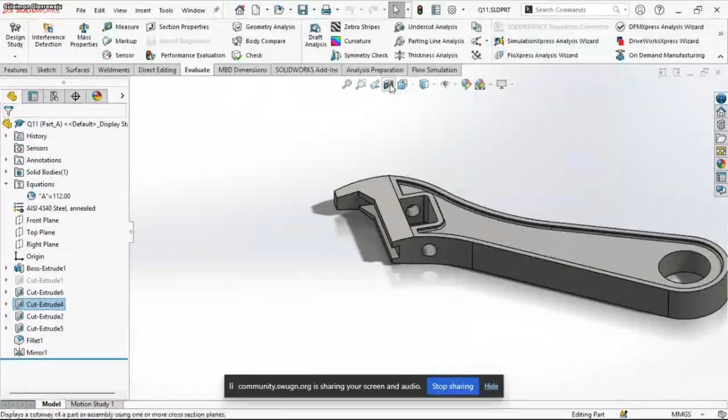Also, I hope you guys know how to use your section view and section. So you have to make sure you select the right one, like the one given in the question. You click on this now and compare and contrast, you notice that they're actually the same. So the one given in the question, look at the question.

I hope you guys are still there, but I know I've already said it. As you can see, this is detail G. So you can always use your section commands to know your section. It's very, very, very important.

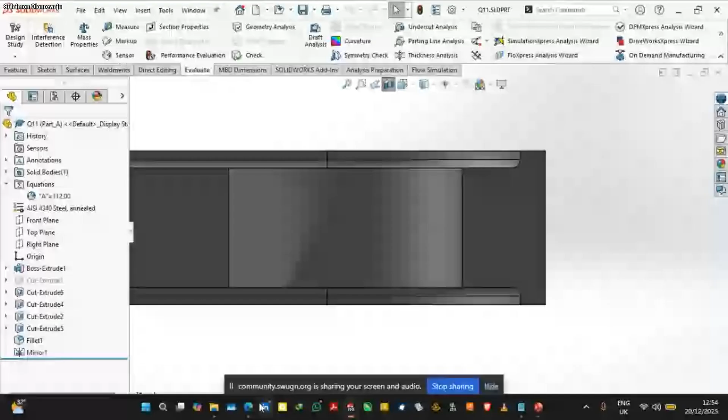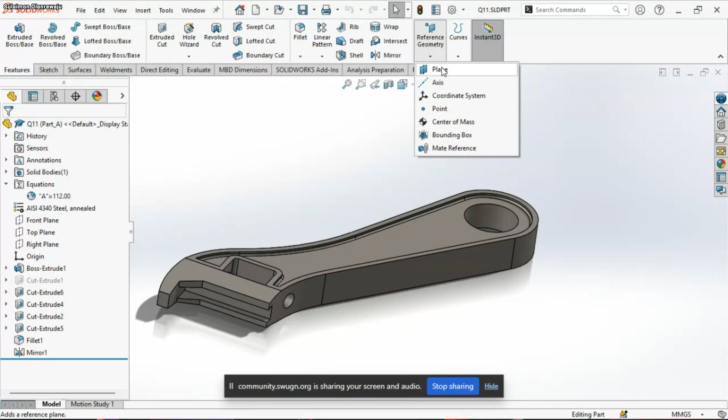I hope you guys understood these last few things I just said. It's very important, measuring, how to measure. Sometimes you may be asked to create... you want to turn off the section view, just click here, then click back to go to the previous one, so you can see edit. So sometimes they ask you to add reference geometry, like the coordinate system, to a particular part, and from there use that coordinate system to measure an actual value. It can also be asked to create an axis or a plane, you know how to draw that already. So that will be all.